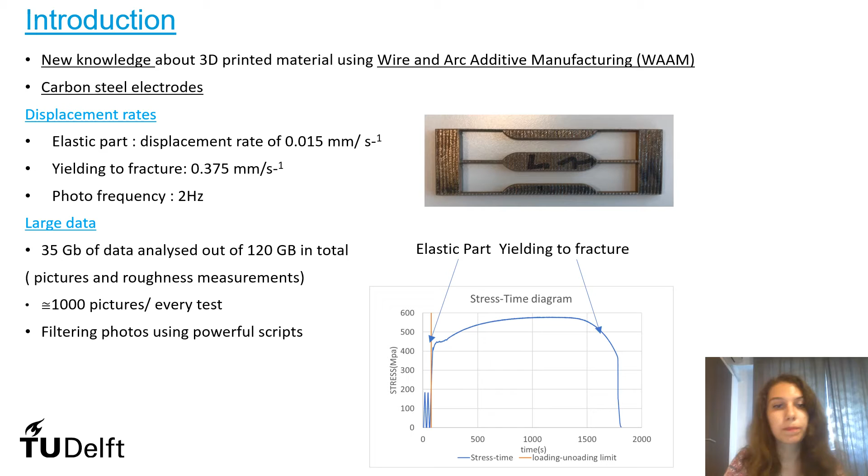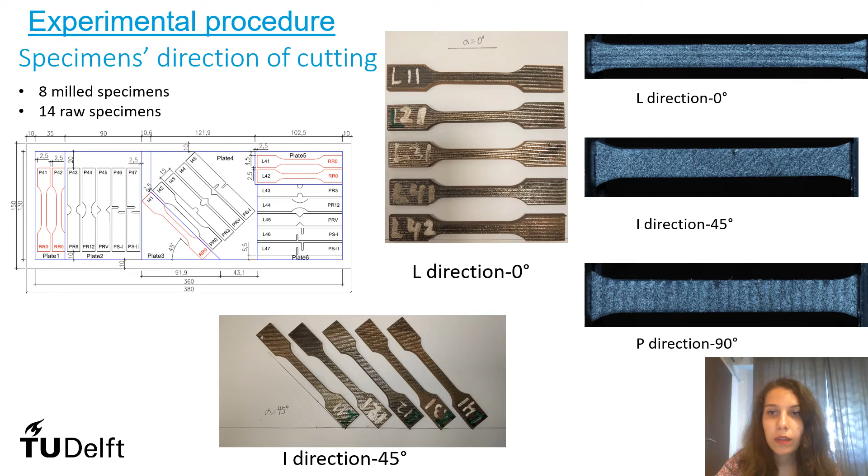Regarding the experimental procedure, 8 milled and 14 raw specimens were analyzed. We used the smallest specimen available in order to cut as many specimens as we could from one plate. The specimens were cut perpendicular, inclined, and longitudinal to the printing direction, and in the pictures, the roughness shows the cutting direction, which is longitudinal, inclined here, and perpendicular to the printing direction. We analyzed milled and as-printed specimens, cut in different directions from the plate, in order to inspect the geometric irregularities and anisotropic behavior of the material.

The testing protocol was made according to the American standard. For the measuring technology, we used digital image correlation, and to validate and calibrate the results, we used finite element method analysis. The final objective of this research is to find a material model for 3D printed materials using elastic-plastic hardening and damage parameters.

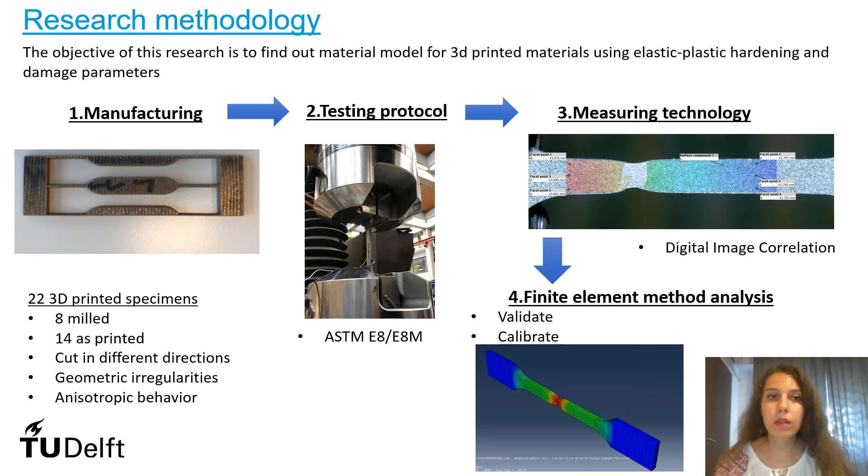Regarding the stress-strain curve methods, the standard gauge length of 25 mm was used, and in GOM, I used two types of analysis, which are the facet point and the surface analysis. For both analyses, I defined 3 sets of points and the gauge length between them. 2 gauge lengths were on the edges of the specimen and 1 in the middle. Both types of analysis, the surface and the facet point analysis, provided similar results.

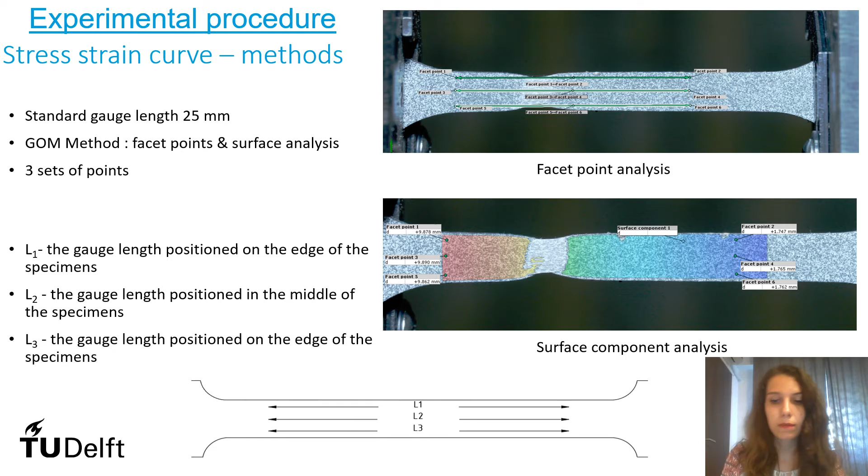Furthermore, I used the force obtained from the machine and the displacement obtained from the digital image correlation, transferred the displacement to strain by the gauge length, and ended up getting the stress-strain curves. For the stress-strain curves, I extracted 8 TUD characteristic points, which are the proportional limit, the yielding point, the start of the plastic behavior leading up to the ultimate strength and strain. Points F and G are 2 points that describe the post-necking behavior, leading up to the fracture strain.

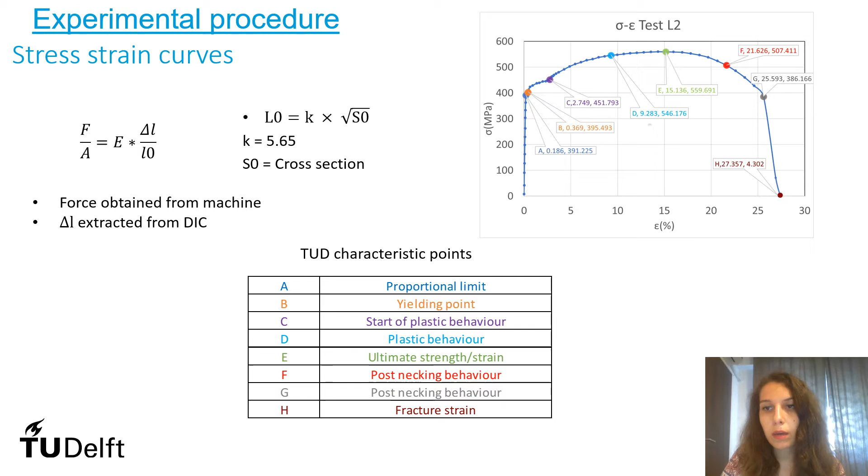For the elastic material properties, I determined the E modulus, Poisson ratio, and yielding stress using a nominal stress range from 50 to 300 megapascals, and for the E modulus and Poisson ratio, the classic methods for determining the properties. For the yielding stress, I computed a 0.2% strain offset with the slope of the elastic modulus, and at the intersection of the 0.2% line and the stress-strain curve, I found the yielding point.

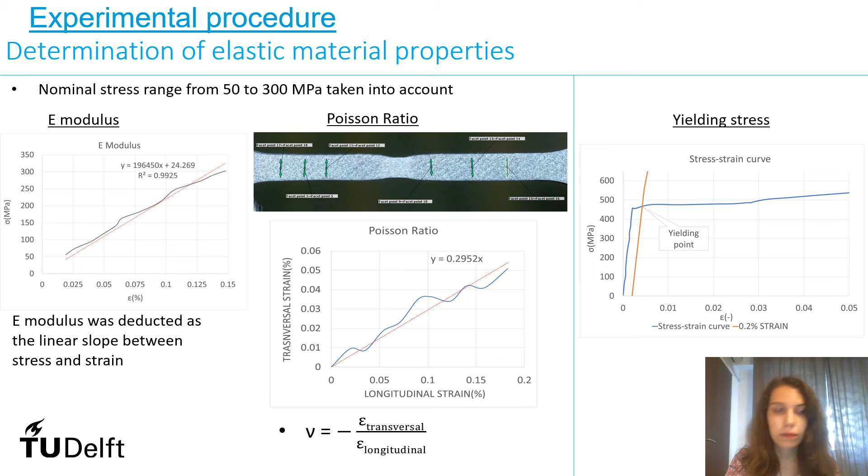Finally, I obtained all the stress-strain curves for milled and also as-printed specimens cut in the longitudinal, perpendicular, or inclined direction to the printing direction. They are very similar up until the ultimate strength, and after that they start to be a little bit different.

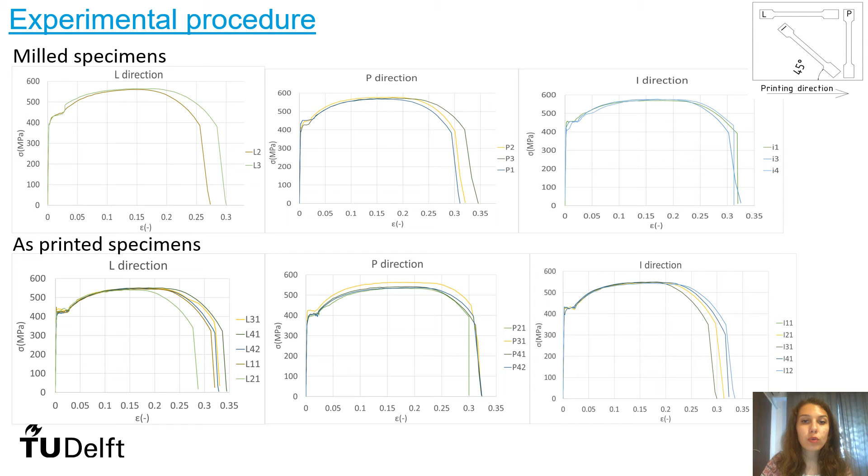To calibrate the material model, in the elastic stage, I introduced the E modulus, Poisson ratio and density obtained from the test. In the plastic stage, I calculated the true stress and the true plastic strains, and then in the coupled plastic damage zone, I used the weighted average model, calibrating parameter W, the weight parameter, and parameter B that best describe the damage.

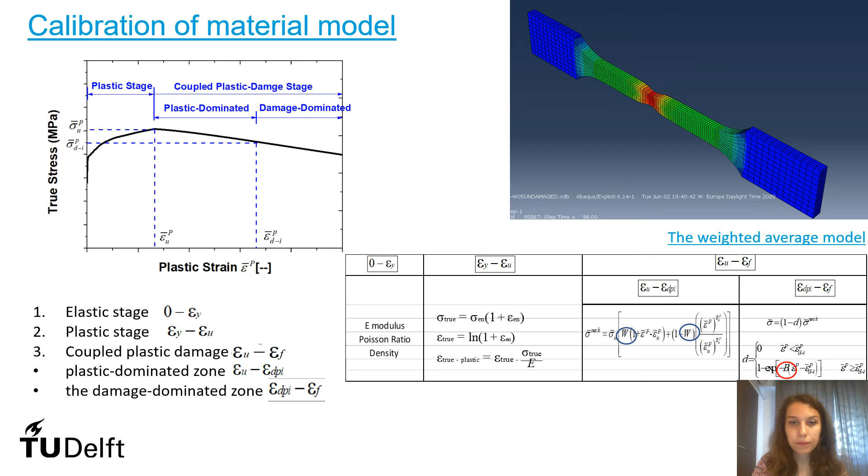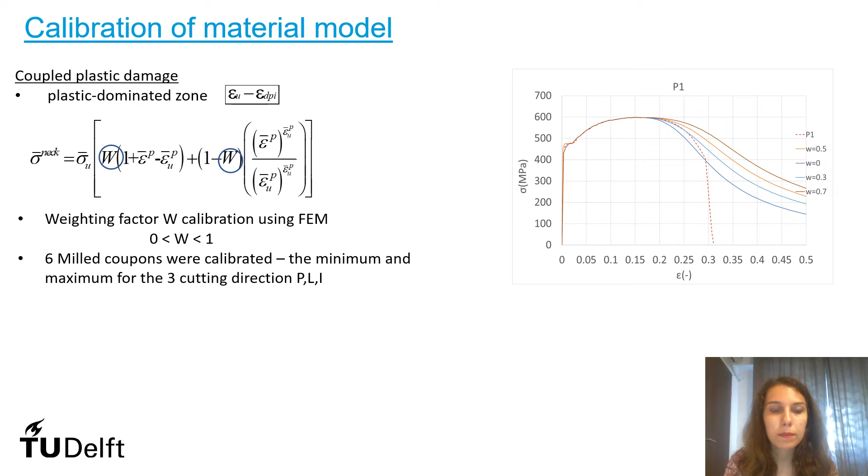In the coupled plastic damage, plastic dominated zone, the weighting factor W takes values between 0 and 1. I calibrated the weighting factor using finite element method. I calibrated 6 milled coupons, the minimum and the maximum for the three cutting directions, which are perpendicular, longitudinal, and inclined. In the coupled plastic damage dominated zone, the weight parameter W is not enough to describe the damage evolution. Therefore, parameter B has to be calibrated again using the finite element method analysis.

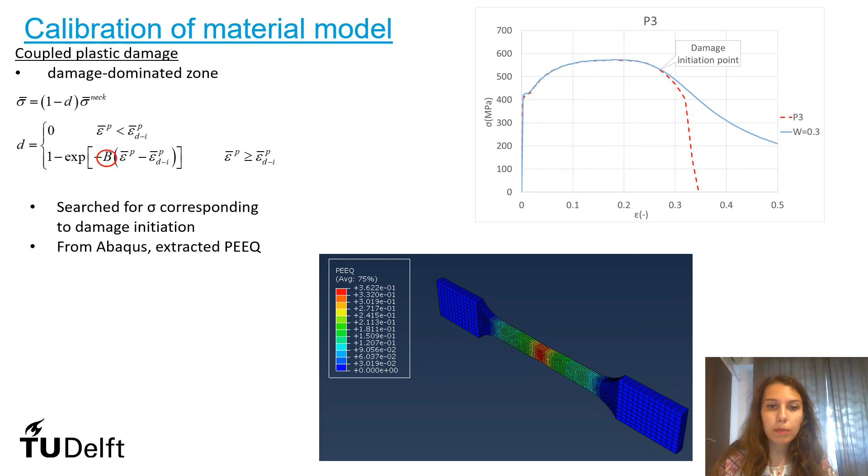We can see that the stress strain curve from the test and also from the simulation agree very well up until the damage initiation point. Therefore, to calibrate parameter B, I searched for the sigma that was corresponding to damage initiation, and in Abaqus I extracted the plastic equivalent strain. Furthermore, I obtained this way, by calibrating, the B parameter for 6 tests for milled coupons, the maximum and the minimum, as I said before, for perpendicular, inclined, and longitudinal cutting direction regarding the printing direction of the plate.

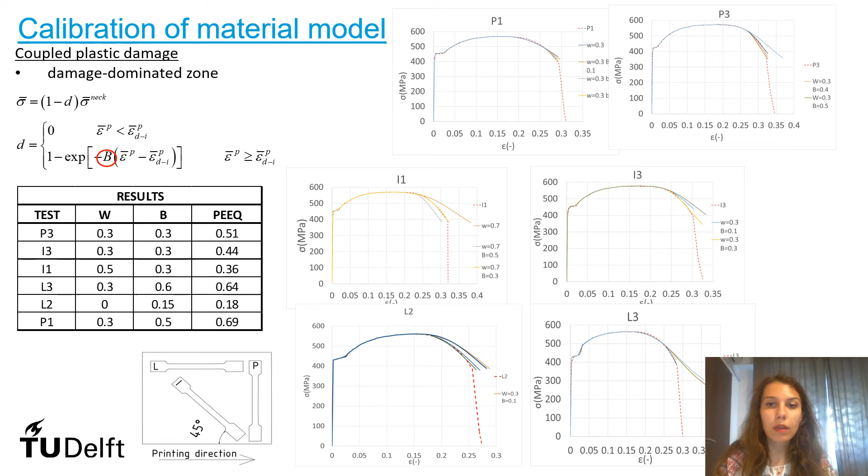If we make a comparison between the finite element method analysis and the digital image correlation, the results are very similar. For this particular specimen, I got 61% plastic equivalent strain, and from the DIC for the same specimen, I got 60% strain.

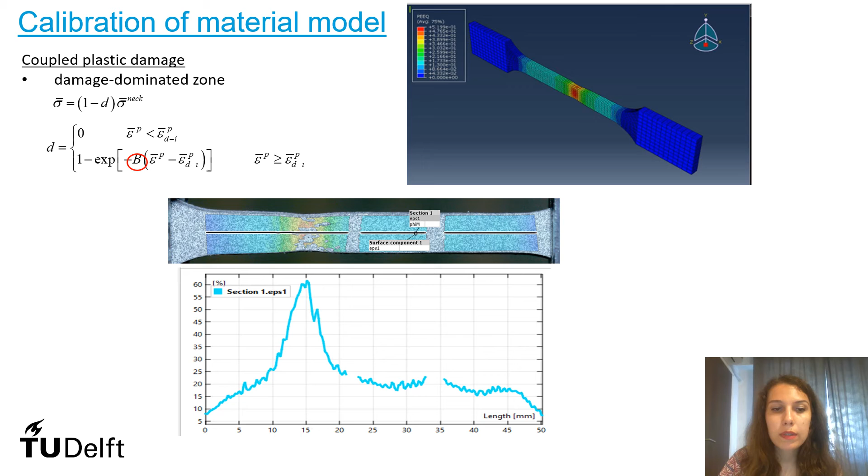From these measurements that were made with different positions for the scanner, I extracted firstly a roughness profile with the height of the roughness and the length of the measurement. I extracted each wave from the roughness profile and put them together, shifted them to 0, and extracted a 6-degree polynomial that best describes the roughness for just one measurement of one specimen.

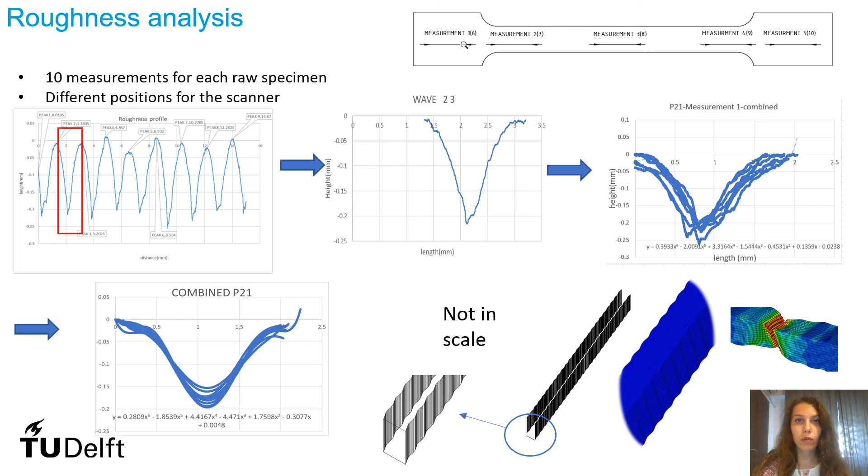Here on the bottom right of the screen, I made a simulation in a 3D program with the roughness of the specimen. This is not in scale, this is 1 to 10, because the roughness being that small, it wouldn't be visible at a 1-to-1 scale. These analyses were furthermore used in another research made by me and my professors regarding the influence of roughness on the material properties.

In conclusion, the material that I analyzed provides excellent results, complying with the provisions of Eurocode 3 for both as-printed and milled specimens, regarding the elastic modulus and the ultimate and yielding strength and strain, which leads us to think that this might be the material of the future and that we might hear of it soon on a daily basis.